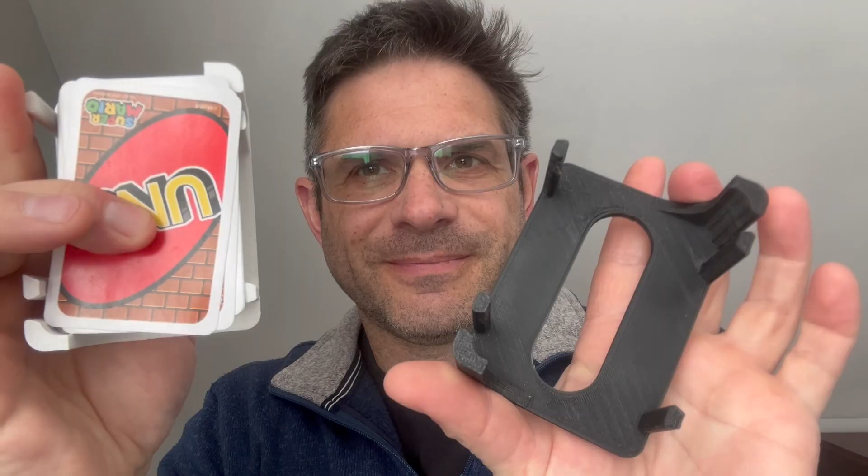We're clicking on Sketch, and we're picking a plane here. We're going to grab a rectangle, and we're going to add our dimensions to it.

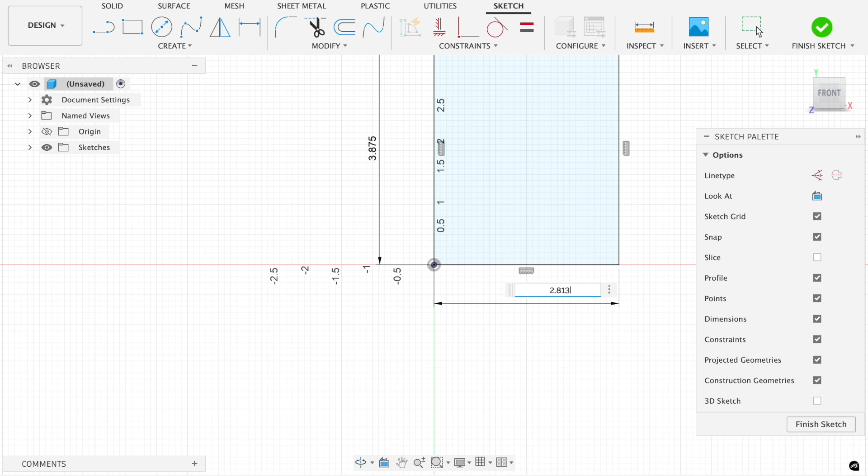I always like to tip it a little bit just to see this extrude. Maybe that's just me being silly.

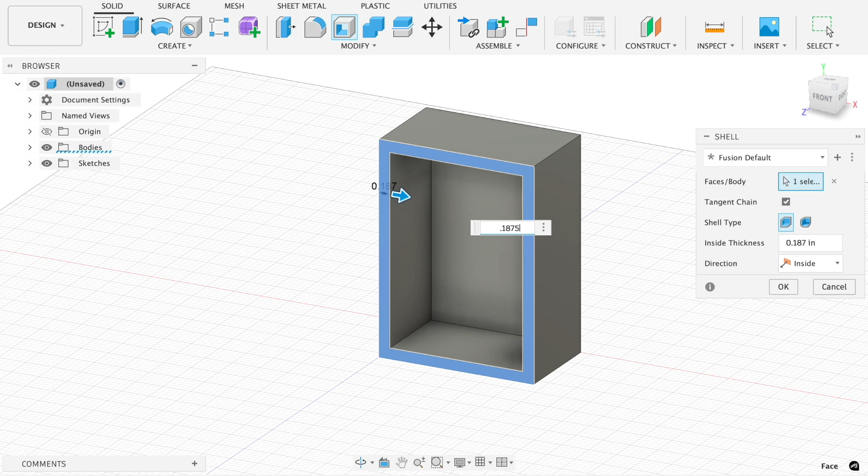The next thing we're going to do is finish our extrude and jump right into the shell command. The shell command is kind of a clever little command where I can just dictate the sides and the thickness of the bottom all in one move. It's kind of slick. You could do an extrude as a cut, but we're just saving a little bit of time here.

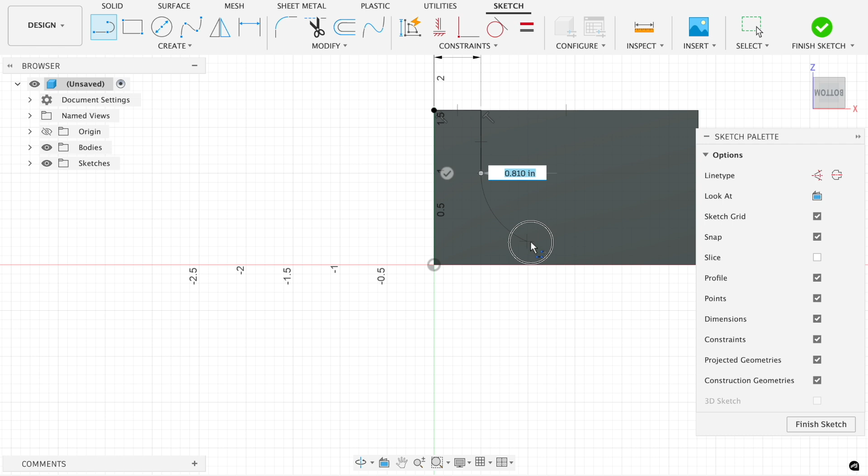We're going to doodle on the bottom of this plane with our line command. The line command has a kind of neat feature where you can drag and make an arc by clicking and holding. And of course, just a little quick line over to the right.

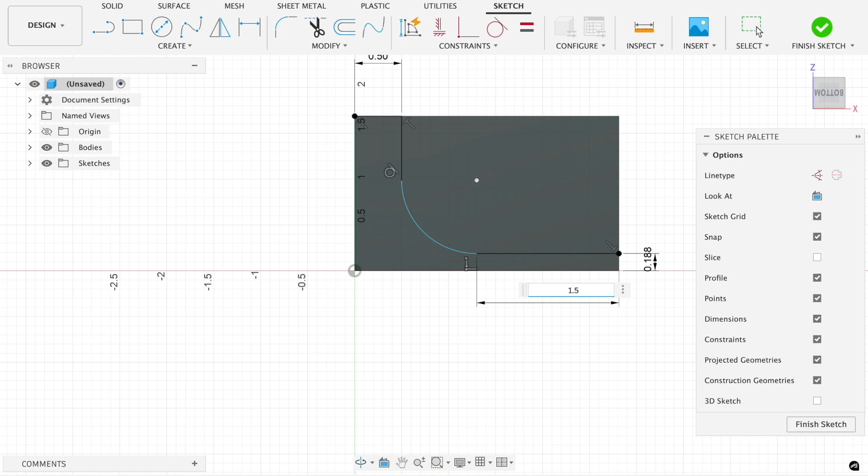I'm adding dimensions to constrain it here. But the one thing I'm going to figure out in a second is that this arc didn't exactly line up tangent with my horizontal line. And we can see here when I zoom in, see how that just doesn't quite line up?

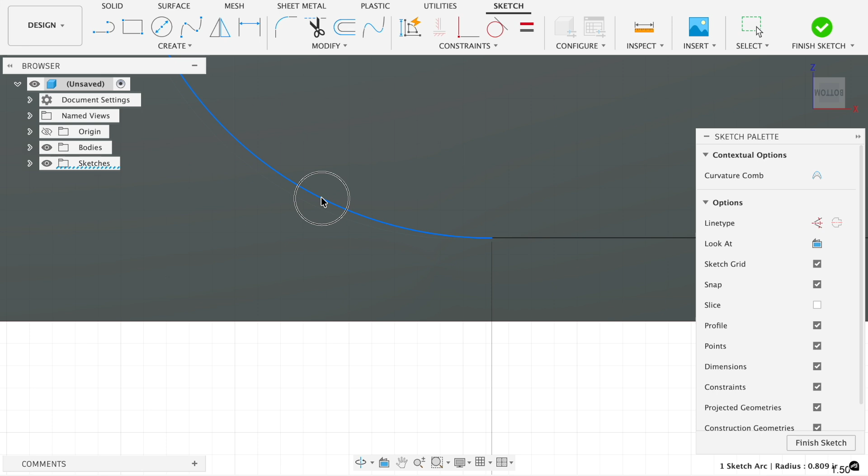I don't like that. So what we can do is jump out and delete that radius. And we're going to jump up to our constraint window and grab our tangent. And when we see the little symbol there line up, we now have a tangent line.

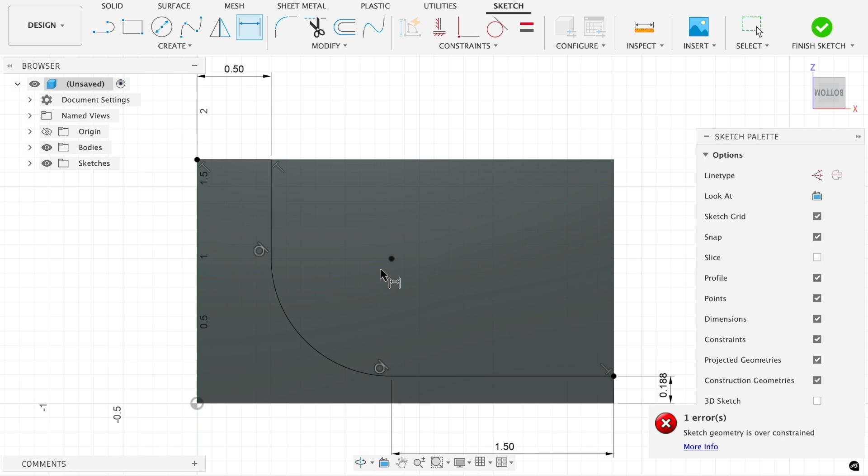Now this is warning me of an over constraint. But we're going to finish the sketch and start an extrude here.

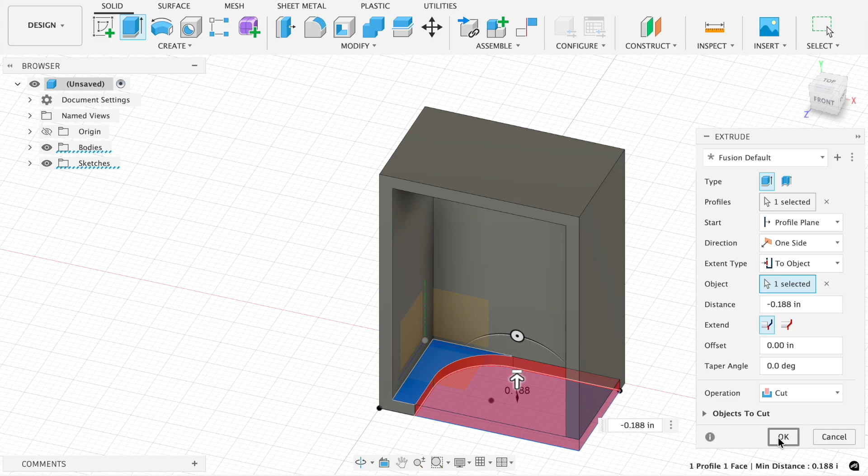Now, turns out this was a mistake, but I didn't catch it at this moment. We're going to see it pop up here in just a second. But you can see that I kind of sort of like this, the cutaway, and I'm adding work planes here.

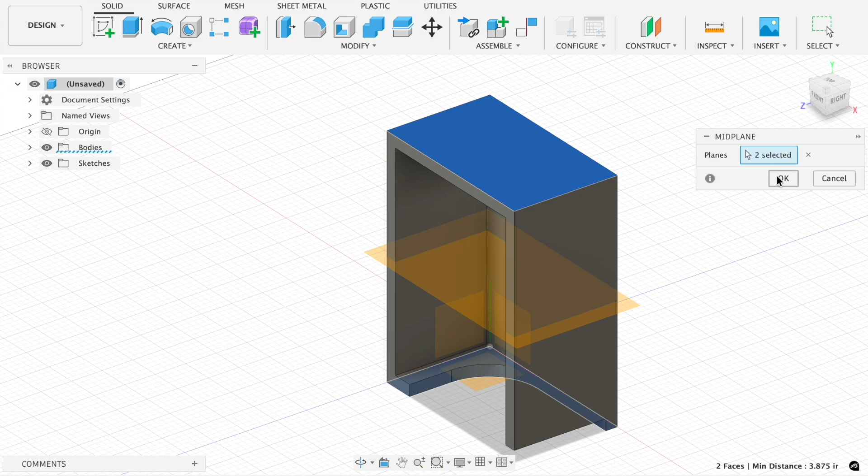And so the work planes I'm going to use to grab an axis to spin off. And you can see that I'm selecting both sides of the box in a mid plane. So I'm basically adding an imaginary plane right in the center of this box, and see how that turns into an axis where those two planes meet.

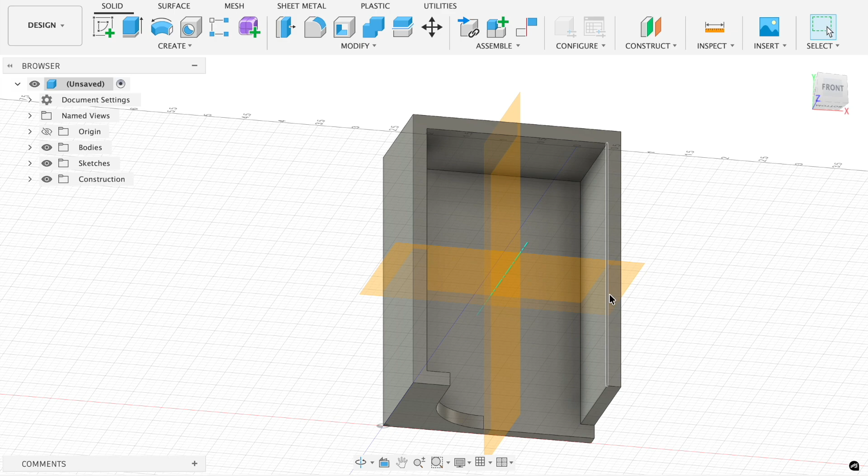That's going to allow me to use the circular command for pattern. And what it requires you to do is pick a central axis, as you can see here.

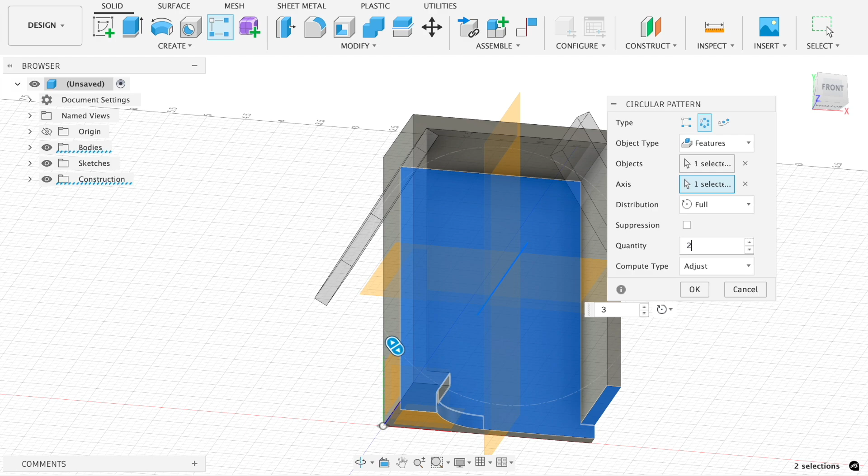So now that we have our original cutaway, we can rotate it, and oops, this is the part I was worried about. See how it cut all the way through? I'm going to figure out how.

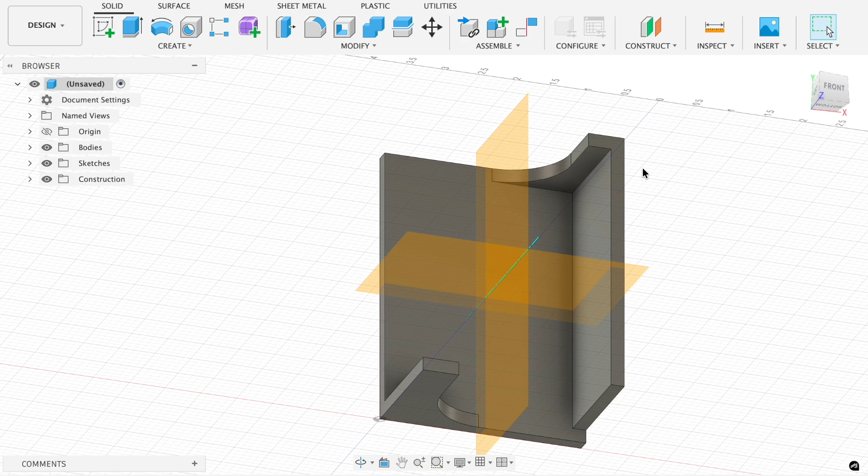This is me trying to understand this reality, but when we circle back, we're going to see that I'm just going to do a distance on that extrude cut. And here it is. I'm now finding that this distance, so now you can see that this extrude cut doesn't go very far. It doesn't go to a new thing. It in fact terminates at a very precise depth.

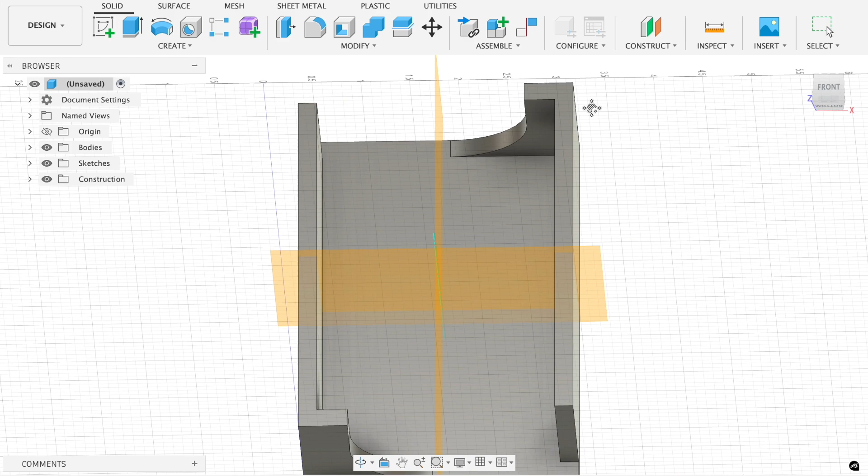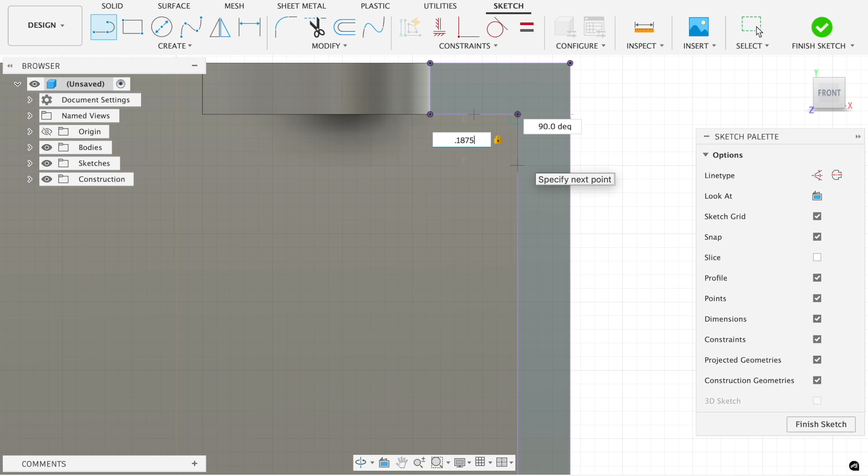So what I'm going to start doing here is start working on these little notches here. So I'm doing P for project geometry, which will allow me to design this little keystone shaped cut.

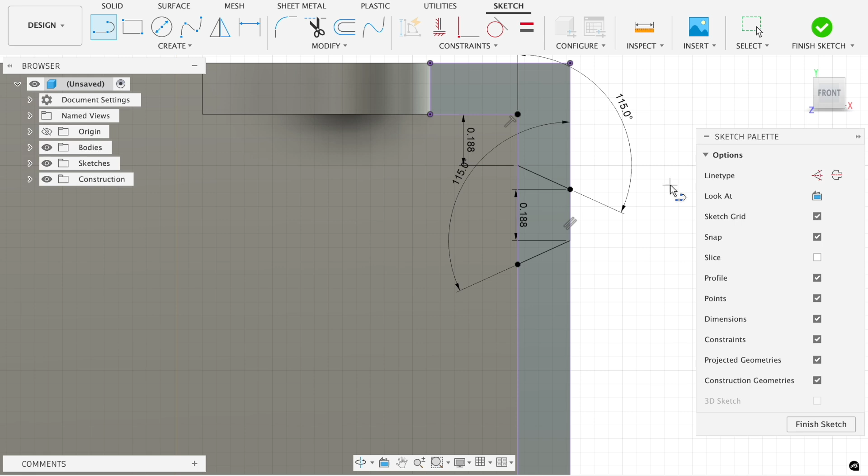And we're going to constrain it here, or dimension it rather, and add more lines. And this constraint here is also going to allow us to completely define its shape. We're going to finish sketch, and then we're going to do an extrude.

And we're going to click our area, and we're going to do a cut. And we were picking our cut to the bottom of this holder.

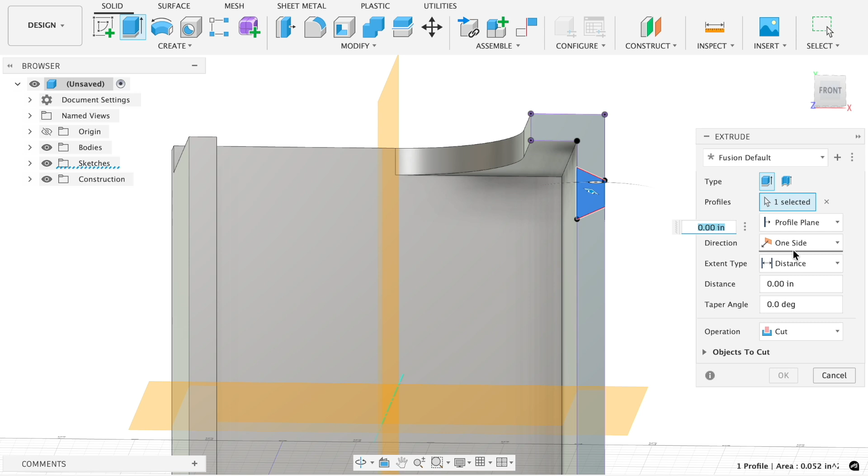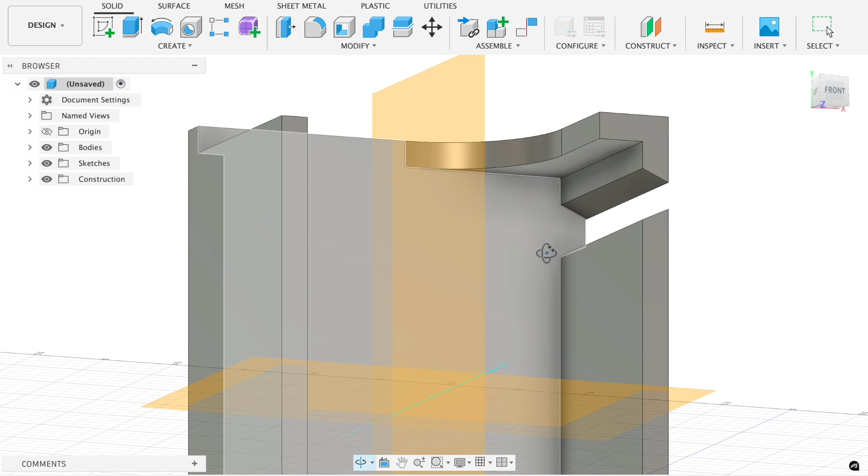Here we go. So that's kind of a taste of what that's going to look like there. I'm pretty happy with that.

So what we're going to do next is do a rectangular pattern, and we're going to drop that feature down into the bottom left side. And of course, since we have our axis, we can spin it around the axis.

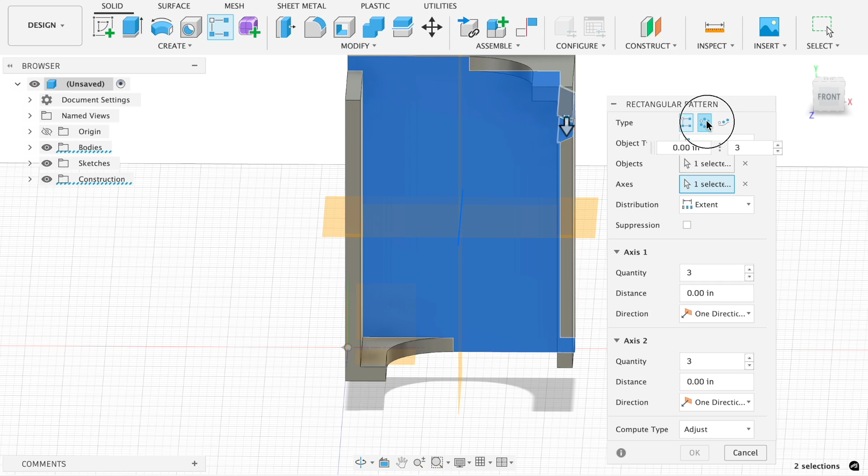I like how it kind of shows you in advance where those cuts will be, and you can add more or less instances. And of course, there's 3 instances that it shows you, but we only need 2, the first one and the last one.

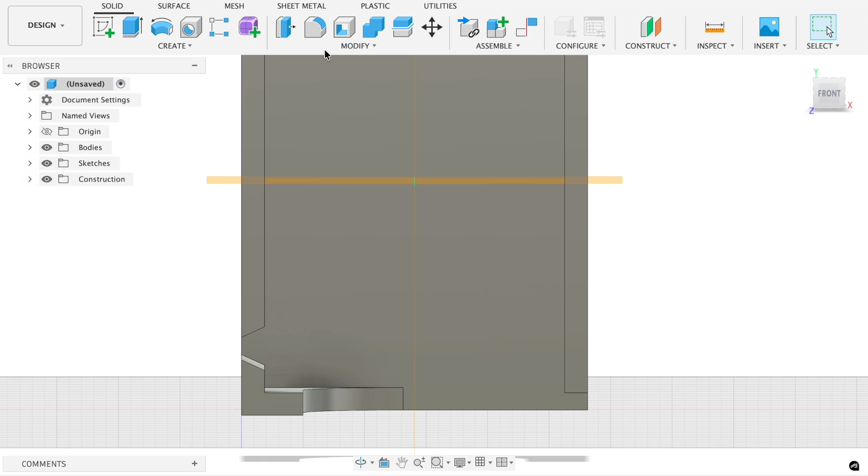I'm kind of happy with that. We could have combined these two cuts into the same sketch, but I'm going to use this sketch down here and project the geometry.

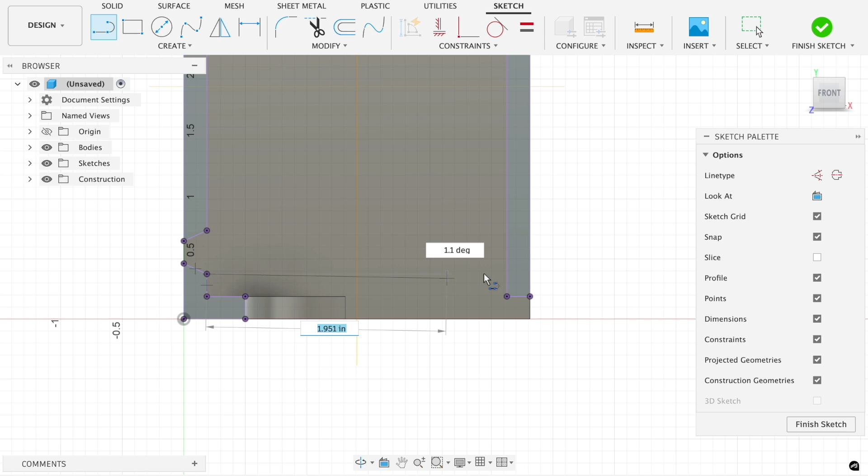To make my sketch rolling easy, I'm going to run lines from the left to the right, and that's going to show me the extent of this keystone. Instead of a notch, this is going to be like a keystone peg, as it were.

Most modern drafters don't bother with this. This was an old holdover. I was trained in manual drafting with pencils, paper, erasers, T-squares, triangles, all sorts of that crazy material. And now CAD and 3D modeling is really good about this.

See how I click from the bottom right and go to the top left? That's a way to select multiple lines all at once. And of course, I'm just coming through and dimensioning here.

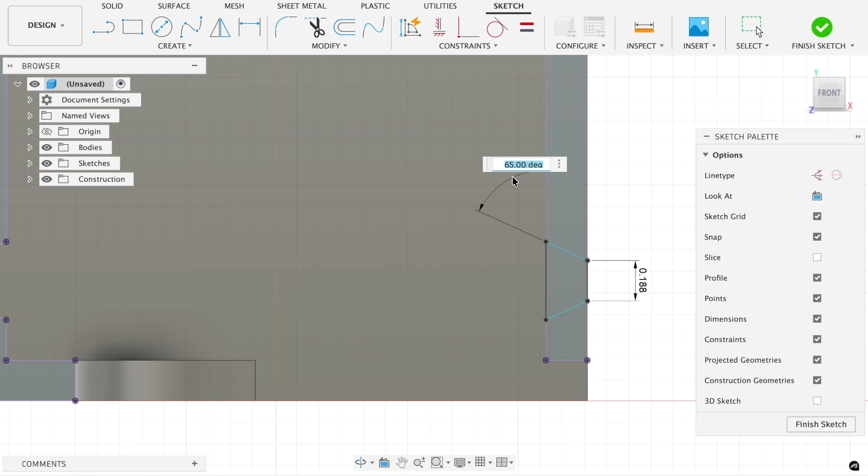I'm adding my constraints, there shouldn't be anything exciting here. It was all based off of a geometry, and we're just constraining it so we know Fusion 360 isn't going to freak out.

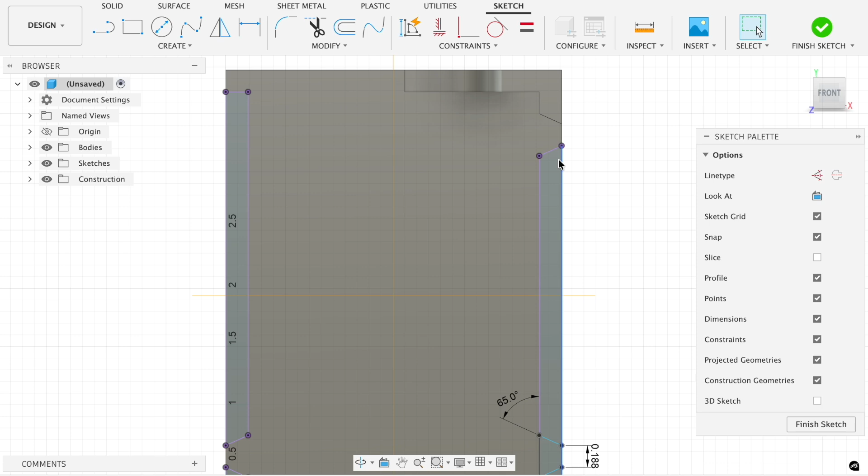Now we're going to work on a keystone shaped wedge here. It's the same as before, we're just repeating this. This is one of the best ways to learn, is just through repetition.

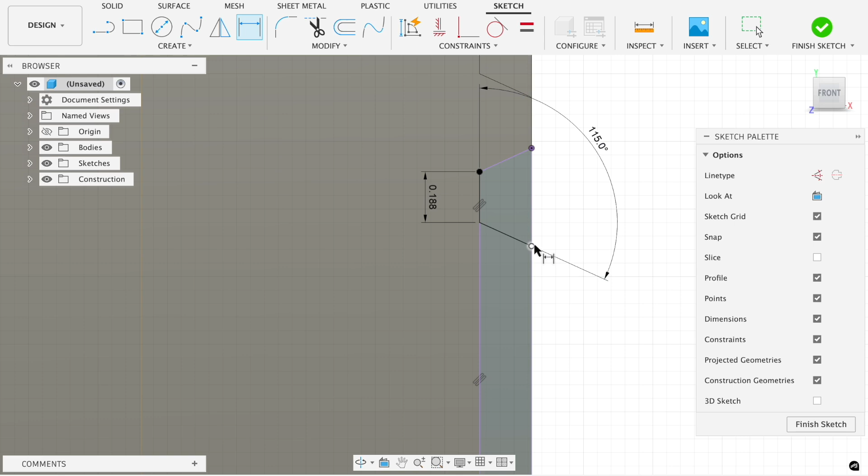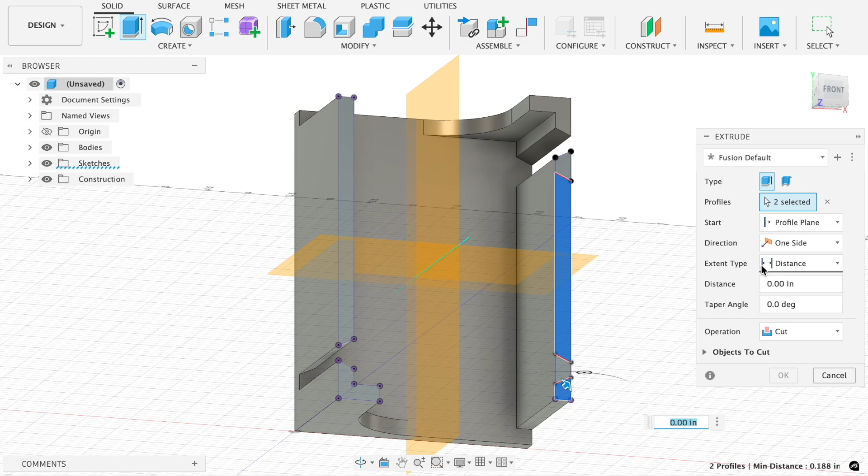Of course there are quicker ways to build this, but on our first design I'd rather see you guys repeat the same operations again and again so you get them down pat. Now we're going to do an extrude cut here to remove all this material, and this will leave behind just two keystone-shaped pegs, as this shows here.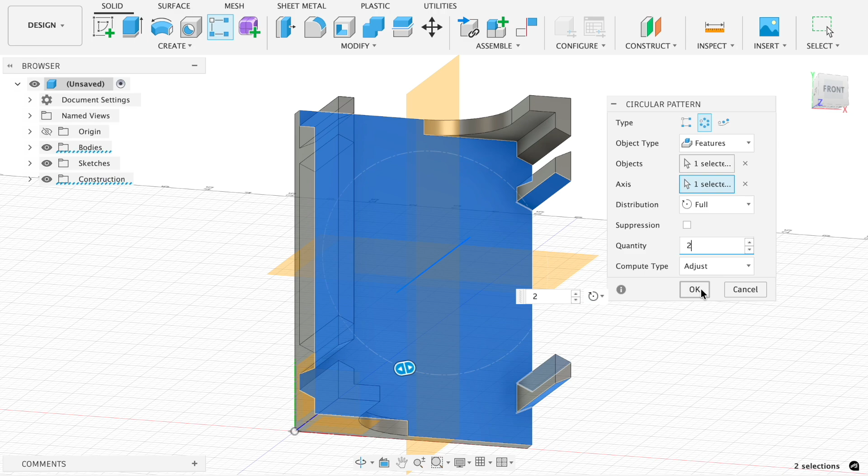Then we're going to run up here to a quick circular command. We're going to drop that new cut on the left side. And that's kind of what she looks like there.

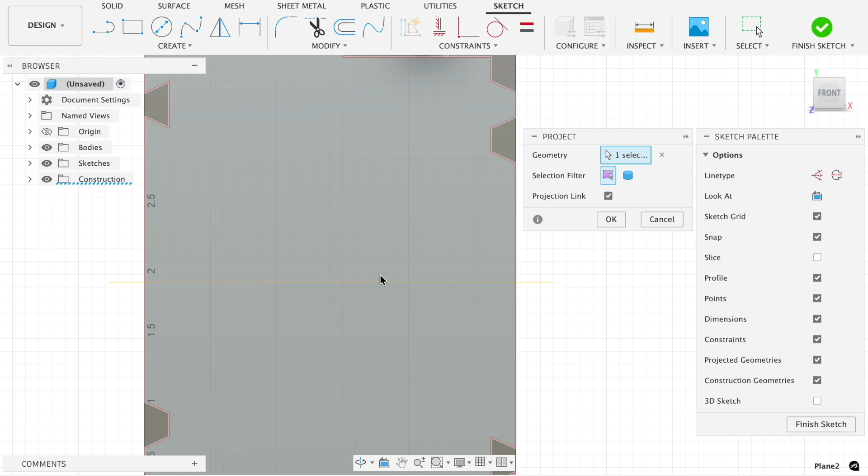So I'm going to put a slot in the bottom here with a projecting geometry of our two midplanes that we added. Just drop a circle in here. We're going to make that one inch.

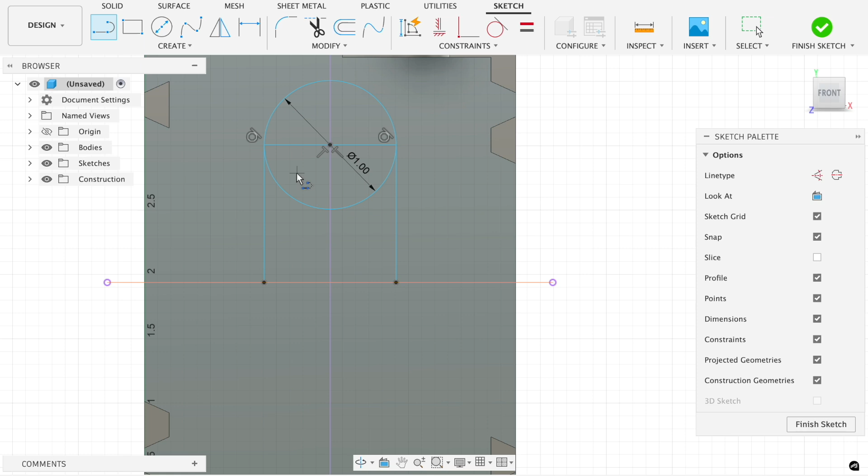And then we're going to send lines. Again, this is an old holdover from the way I was trained, but now I know I'm going directly tangent to that circle, that's all I'm trying to accomplish. I'm going to use the trim command here, just a quick T, and then I can erase all these lines that I don't need anymore.

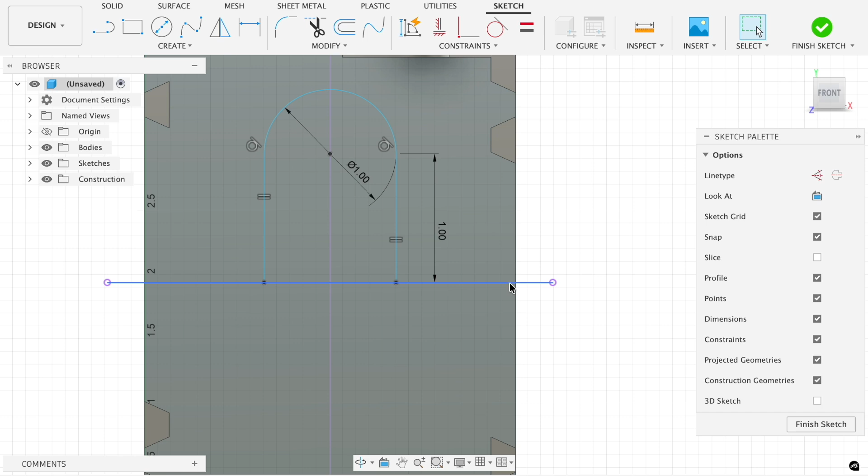I'm just adding some quick dimensions to really lock this in place here. There we go, that final line really showed that whole thing is locked in place.

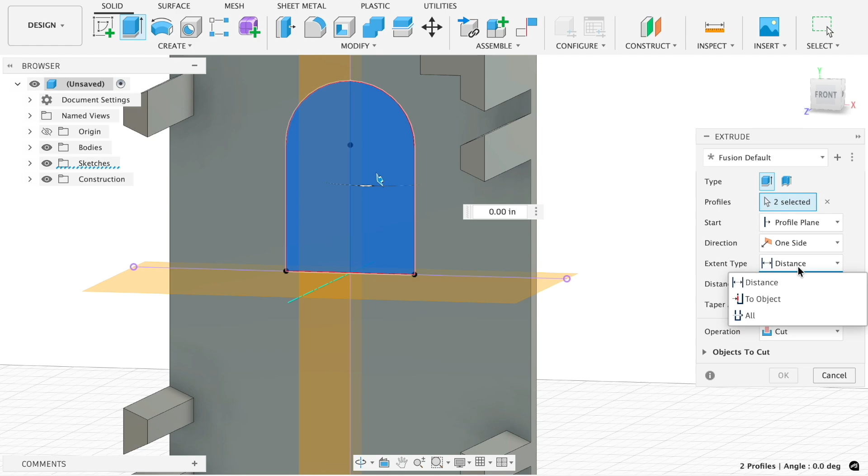Finish our sketch, we're going to do an extrude. We're going to cut this notch in here. There's no reason why we couldn't have made this notch the full length.

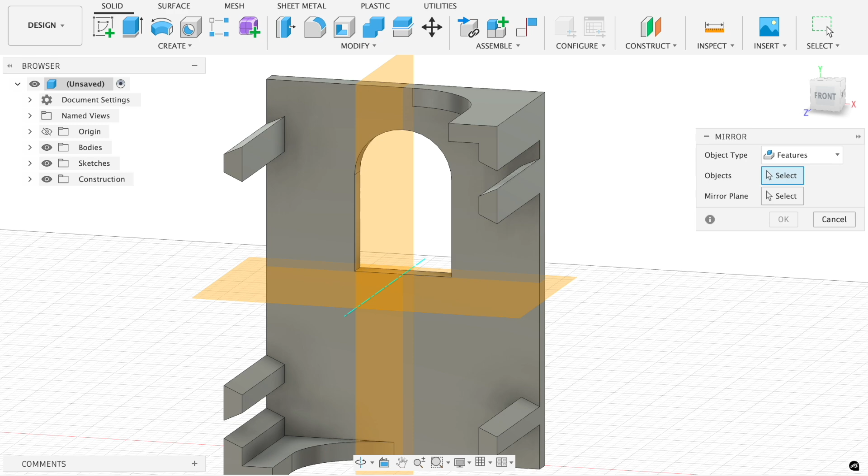I felt that if I just did half and do a mirror, then I would be satisfied that I wouldn't have any mistake centering this slot into the bottom here. Anything worthwhile on here?

That's me just turning off the model real quick. I just wanted to make sure that those planes were missing here.

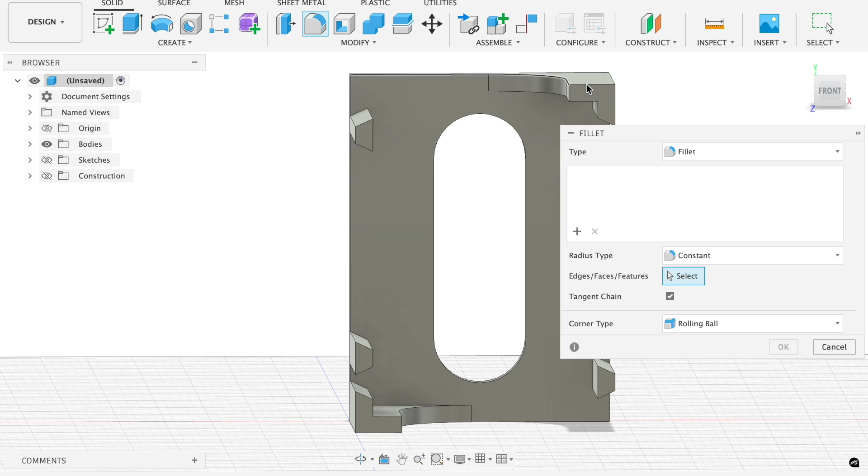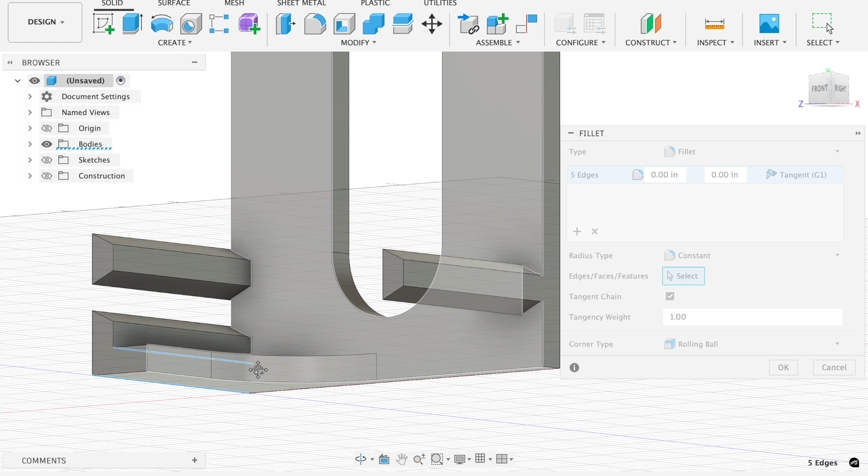And we're going to be jumping into doing fillets. So when we 3D print a part like this, having a sharp corner causes a stress riser, which means that when you 3D print the part, it can curl and move in ways that we weren't anticipating.

So the fillet command is really nice. You just pick all your edges, you pick your radius, and it populates exactly what you described to it.

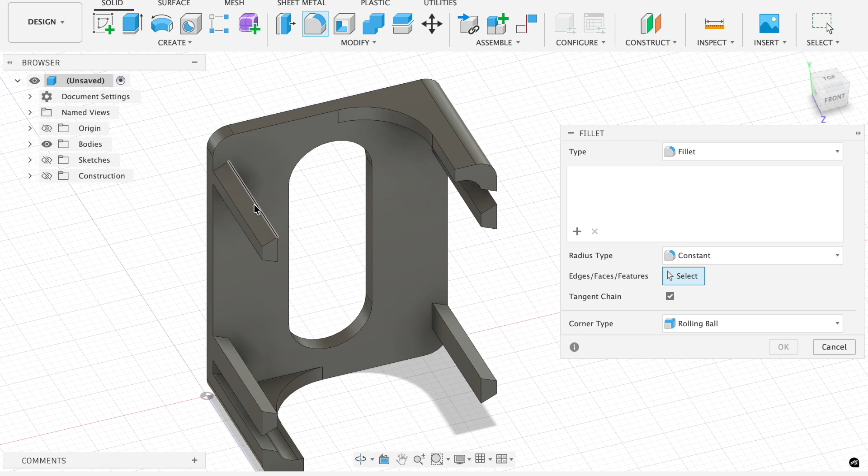I'm adding an even smaller and tighter radius to these few here. Same idea, I don't want to add a ton of stress to these keystone shaped pieces. I want them to be nice and straight and tall, I don't want them to curl at all.

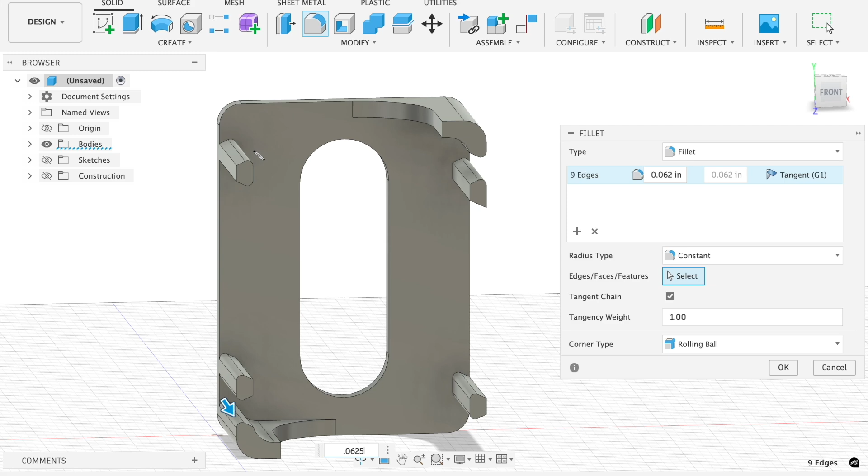We're going to hit OK. And I am reasonably happy with that.

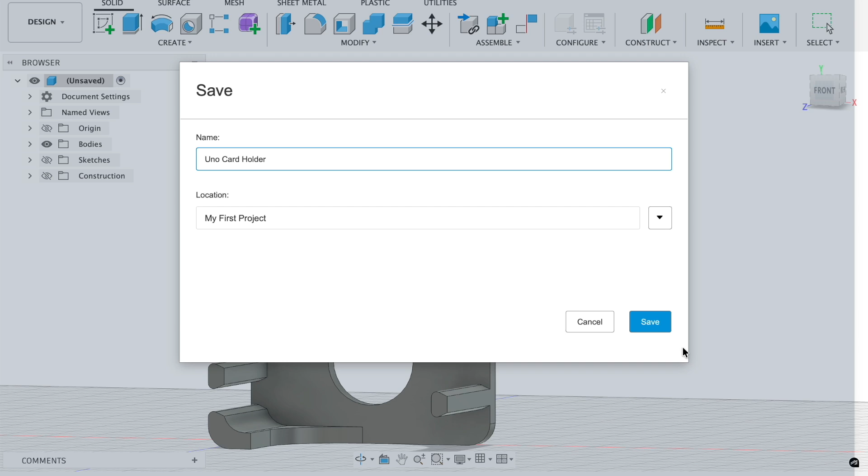Of course, we're going to do a quick save on this so we don't lose all of our hard work. And we're going to export this as an STL. STL is a common file used by 3D printers.